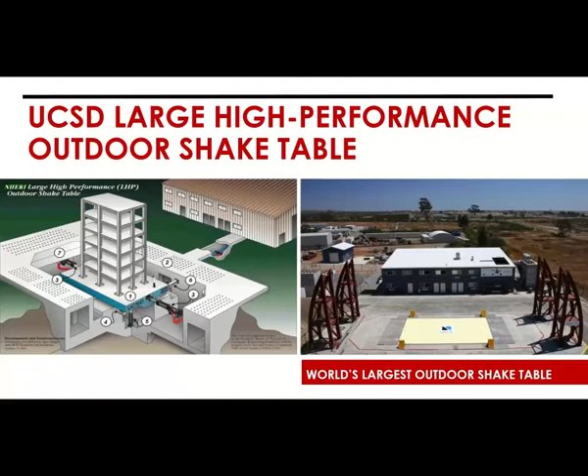This is just a picture of UCSD, University of California San Diego's shake table. It's the largest outdoor shake table in the world, 25 by 40 feet. What's nice about it, since it's outdoors, is you can build as tall as you want and essentially perform real live experiments, testing real earthquakes that can occur. It currently has horizontal actuators, but it's being updated to have vertical actuators as well, so it's actually going to be able to show all the earthquake forces a building goes through, and then test it.

So the overall concept for this study was we wanted to do a 6-story building. Part of the justification for that was wood - there's a lot of wood buildings up to 5 stories, so we felt like going 6 stories was a way to demonstrate what you can do with cold form steel, which is sort of unique. We picked housing as the model for how the building would be designed, representing a multifamily housing building.

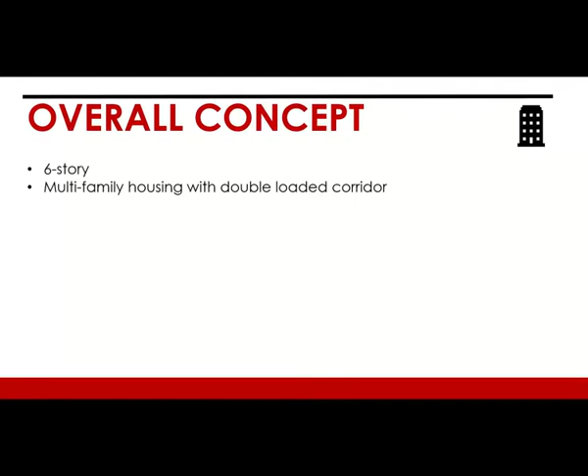The structural components were basically Sureboard shear walls. There were interior corridor shear walls, and some narrow ones on the outside. We put in a little bit of transverse shear walls, not so much because the shake table moves them in that direction, but just in case there's any torsion or anything like that. We used a tension tie rod system, which went down through the whole building. We balloon framed the construction, which is typical for cold form steel, and the sheathing on the floor was actually the Sureboard system.

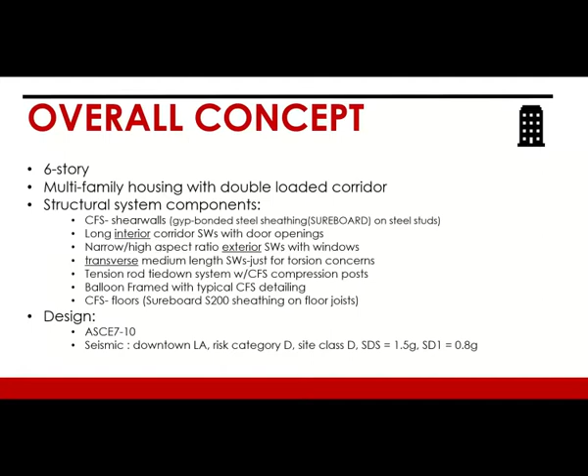And then the design, you've obviously got to pick when you're doing a shake table test, you've got to pick a code that you're going to design it to, which was ASCE 7-10 at that point. And then you got to pick a place. And so obviously you're doing something to test high seismic.

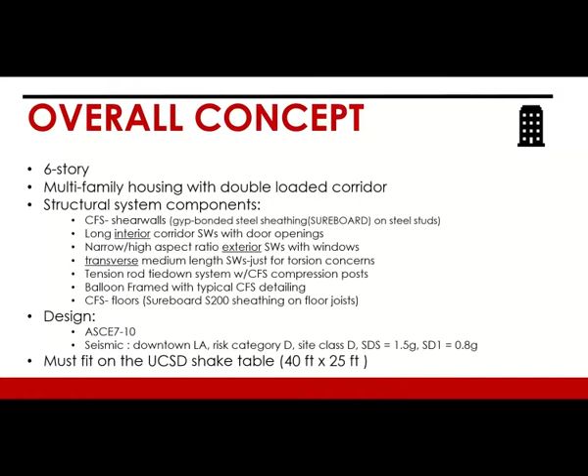So there's no better place than to pick a site in downtown LA. And then the other critical thing is it's got to fit on the shake table, so you can sort of cantilever off of it and do some things to try to get it a little bigger. But we were able to set it up so that it all fit on there. This is actually the footprint of the building. The grid lines you see are where the connectors are on the shake table.

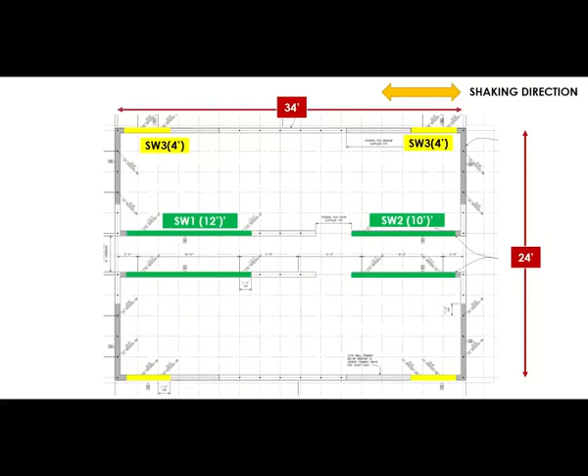And so then we added corridor shear walls, representing a double loaded corridor, so a corridor down the middle. We tried to be representative - architects like windows, a lot of exterior space, balconies and stuff. So generally when engineers design these buildings, we rely mainly on the corridor walls, and in the transverse direction, usually there are party walls that we can rely on. And then this is the party wall stuff we put in that doesn't really get tested, but it's there in case there's some kind of torsion in the building.

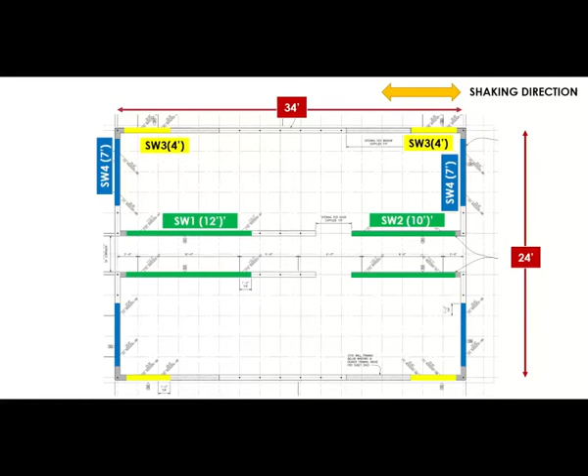And then we actually put a non-load bearing wall down the middle, and this was related to the fire test. In other words, we're going to set fire in a room here, and to create these different areas, we use the party walls or these non-bearing walls to do that.

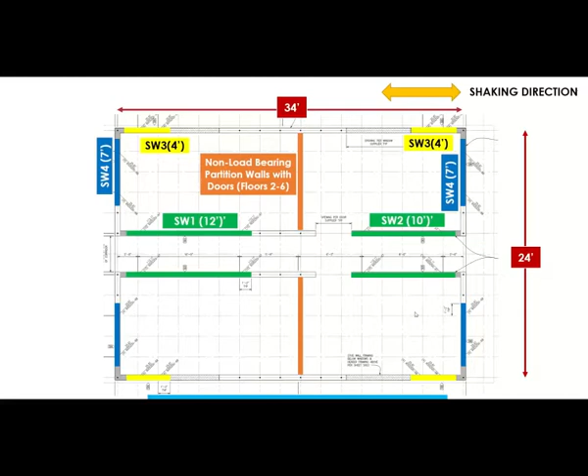One of the things about a building like this and a shake table test is that you really got to have a building that represents the mass a real building is going to have, because the performance is all about how much mass you have in the building. If you build a really light building, it's not going to perform like a real building. Since you can't put gypcrete and all the siding on - that would be expensive - you put these mass plates on that represent all the mass that you can't have.

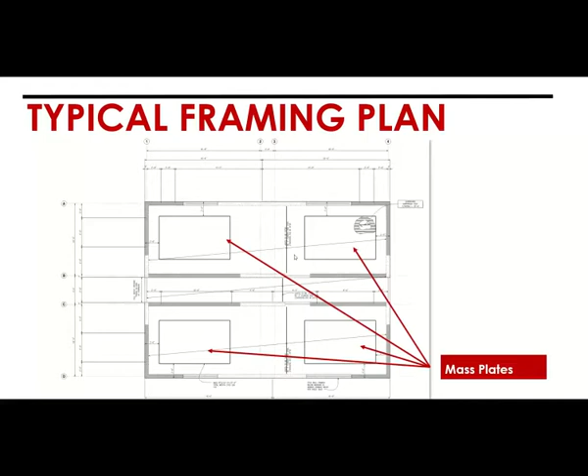And then the other critical aspect of the design is making sure you design the shear walls per code, and you don't over design them, because if you over design them, you end up with an experiment that really doesn't help you. You want it to reflect the engineering that the structural engineer is going to do - the screw spacings and everything else for the shear walls needs to be dialed in pretty well. So essentially you deal with the mass, calculate how much the mass plates are going to be, and use that to back calculate the capacity of the shear walls, trying to get as close as you can to the actual, so the building strength represents what it needs to meet code.

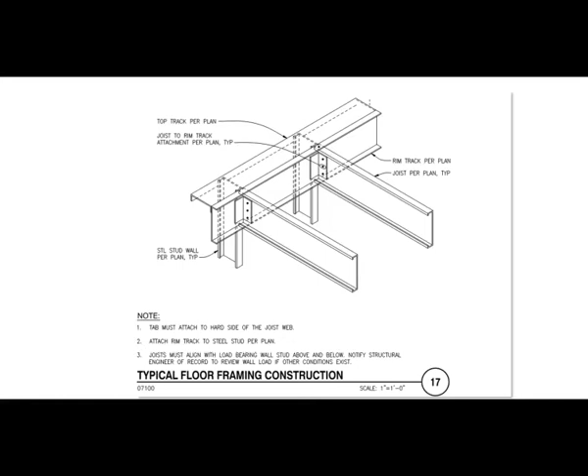We balloon framed. This is just an example of the balloon framing with the track on the side and the studs coming across and connecting to a track. And then this was a typical shear wall elevation, which shows the tie rod going all the way up through, and then there are compression posts on either side.

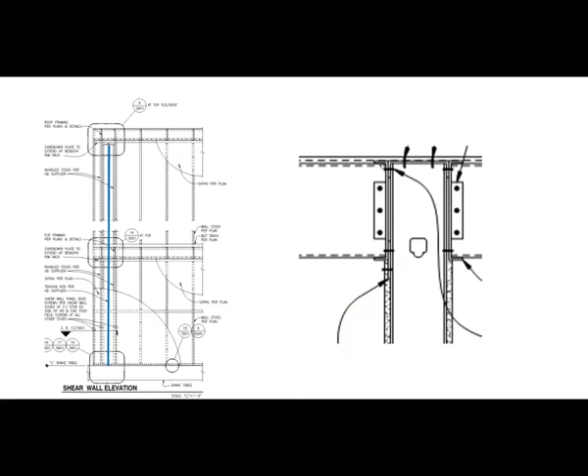And this is pretty standard, particularly in high seismic, to do this kind of a system. The image on the right shows how the shear board comes up, and then the gyp sheathing is taken off, so the shear board can go all the way up and tie into the floor diaphragm.

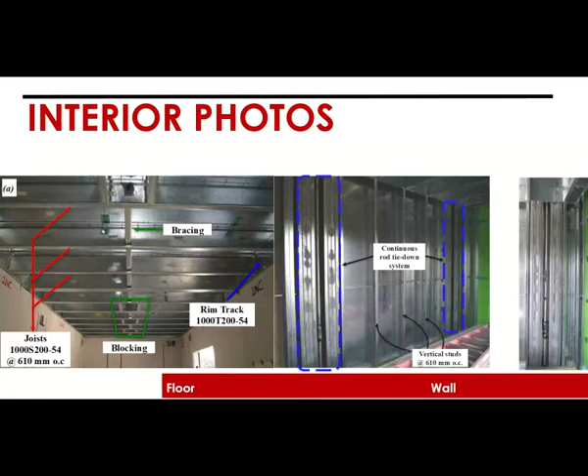And then here's just some pictures of the interior construction, how it was built. Again, you can see the tie rods, the joist, and the studs. This is just to give you a good example of how all that works.

And so now the first video is going to be the actual construction, and you can see how it was built.

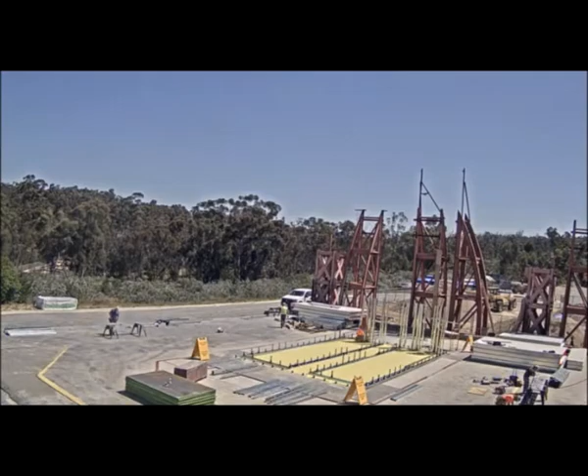The thing that was tricky about it was at the bottom. The first floor really wants to be stick built because we need to have connectors that connect it to the shake table. And so you can tell from the video, particularly as we move along, that this was a pretty long process just to build the first floor.

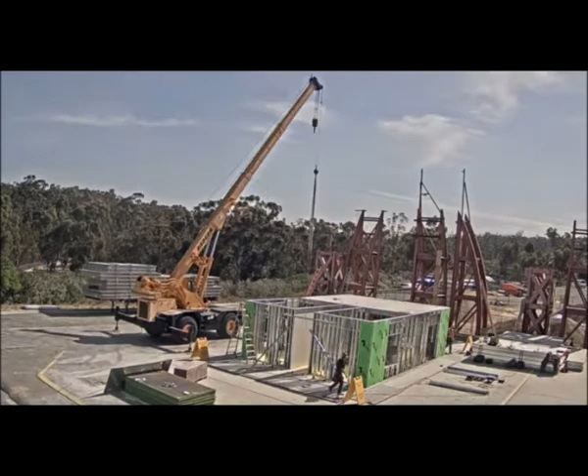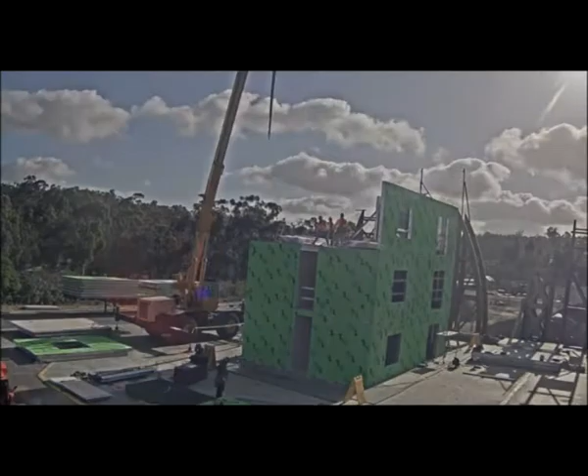You know, because you're basically stick building, which is not the most efficient way to do cold-formed steel. And as we get through the first floor, all of a sudden the panels start coming in, and this goes a lot faster. And then we just keep going up. So we're halfway up the building here at the third floor.

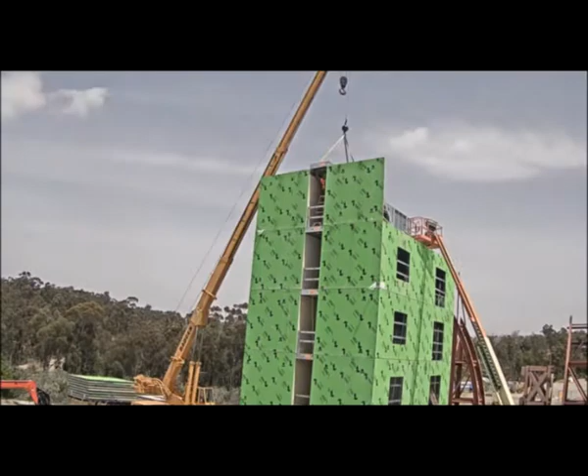So yeah, you can start to see the corridor, the edge of where the corridors are at the middle, and the windows.

So now the issue is about the response of the building. We have to look at the earthquake levels, and there are a number of earthquake levels that we deal with. We're going to be subjected to a lot of earthquakes: some 25% design level earthquakes, just to get a feel for how the building is performing in the periods. Then we'll increase up to 50% of design level, which would represent a small earthquake, then 100% of design level, and all the way up to what we call an MCE earthquake level, which is 150% of a design level event.

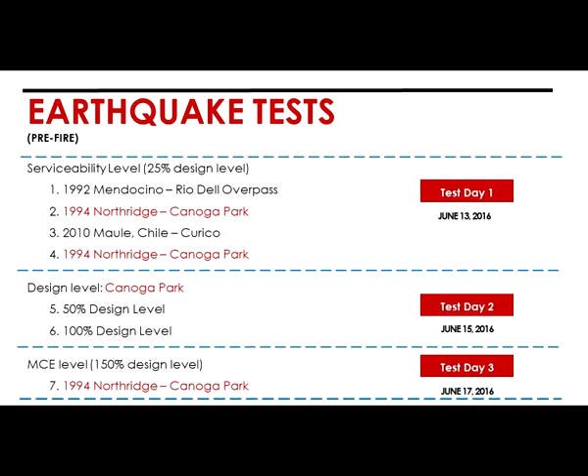What's important to understand is that the design level earthquake is really two-thirds of an MCE, and we would expect the performance to be at a life safety performance level, with moderate loosening of connections and yielding of materials based on the design level earthquake event.

But the building is also meant to be, when you design it for the two-thirds MCE, anticipating that it's going to meet collapse prevention for the really big earthquakes, the MCE.

For Los Angeles, the MCE would be somewhere around a 7.2 Richter magnitude earthquake. For that, we'd expect to see a lot more damage - sheathing sheared off, members yielded, and significant damage to the building. But if it doesn't collapse, then people should not be killed by it, and so it's actually meeting what we engineers would like to see.

Immediate occupancy is also something that is looked at, but for this building, obviously it's a housing building, so we aren't really looking at immediate occupancy.

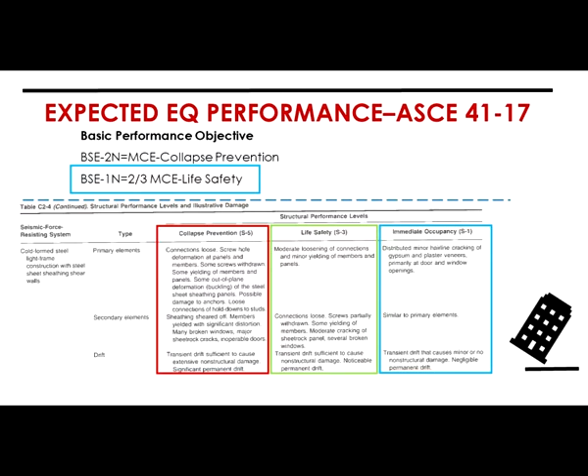So this is sort of my expectation. I wouldn't expect to see damage to diaphragms because they're short spans, and the transverse walls aren't going to really see any motion, so there shouldn't be damage there. I wouldn't expect damage to the tie-down system because that's designed for some pretty large forces, and no damage to compression posts because they're also designed for major forces. I'd expect some limited damage to the short shear walls, but the diaphragm is pretty stiff, so the corridor walls are really where we'd expect to see some cracking of the gypsum board and shear board, and cracking of some non-structural walls around there.

We'd expect to see some pretty good transient story drifts, which is really how much drifting in the building happens during the earthquake, and then some residual drifts as well.

We'd expect to see sort of more damage than you might with a normal building, just because we're subjecting it to multiple earthquakes - it's going to be really raked over the coals. The foundation is also very rigid because we're locked onto the table. In the real world, foundations will rock, and that will actually help limit the damage a little bit in these buildings.

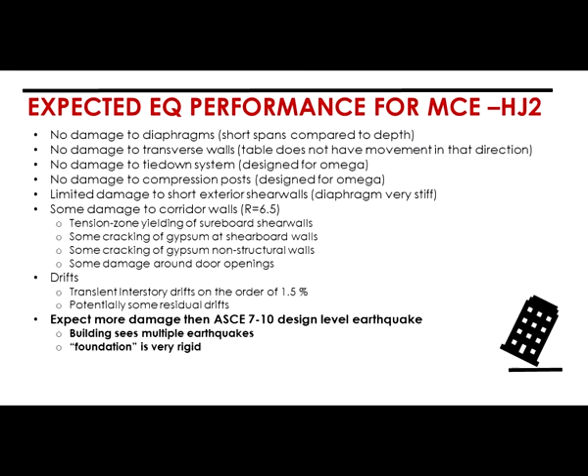So we're going to jump - we actually subjected it to some lower level earthquakes, but we're going to go ahead and jump to the MCE. This is the big earthquake, and this is obviously before the fire - there hasn't been any fire testing on this. It's just been subjected to about 5 or 6 other earthquakes that are lower, and now this is when we get to the bigger one.

Oh, oh man, that's cool. Wow.

All right Steve, yeah. So this is just to show you some examples of the damage for the lower level earthquakes that we saw. This is 25% and 50% earthquakes, and you can see there's minor cracking of the sheetrock, but not significant damage, and you wouldn't really expect to see significant damage for these lower level events.

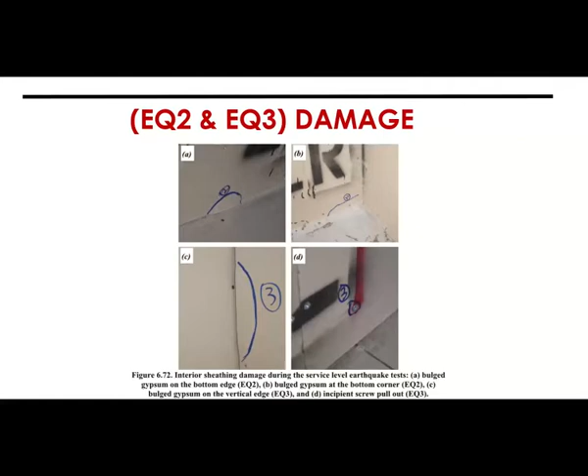This is EQ6, the design level earthquake, and so there is a lot more cracking. This is where the shear wall was banging into a non-shear wall element. That was part of the function of the panelized aspect of the construction.

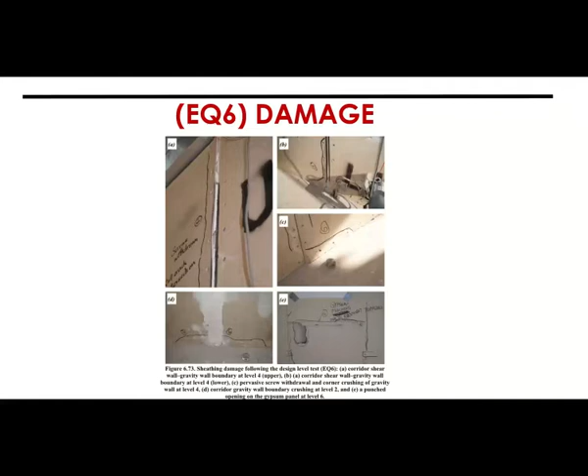Again, doorways, you can start to see doorways having distortions, and so in an earthquake the doors can jam closed, which is not a very good thing to happen. And again, this is the shear wall banging into a non-structural wall.

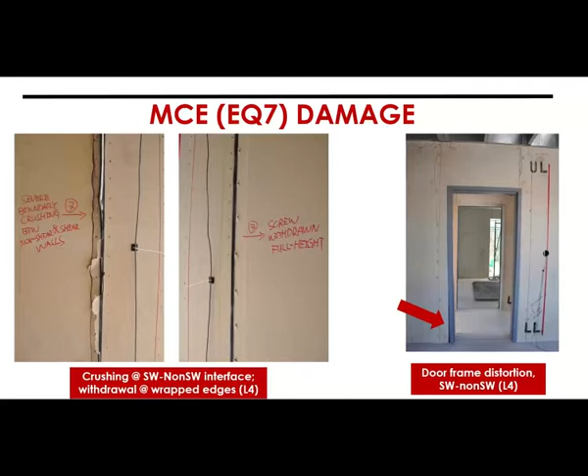You can see for the big earthquake, we started getting some buckling of the track. This is where the shear board chip was taken off the shear board to connect it into the diaphragm, and so that's started to buckle as well.

And then the corners of the shear walls are starting to buckle a little bit here. Again, no real damage to the tie rods or the compression posts. They're all in very good shape.

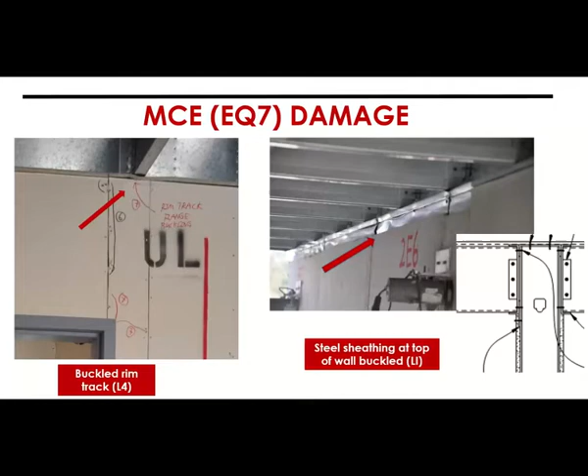Okay, so summary. For the service level earthquakes, which is really the small ones, there's minimal damage. Everything was pretty much elastic in the period. The period's still actually pretty stiff for this building.

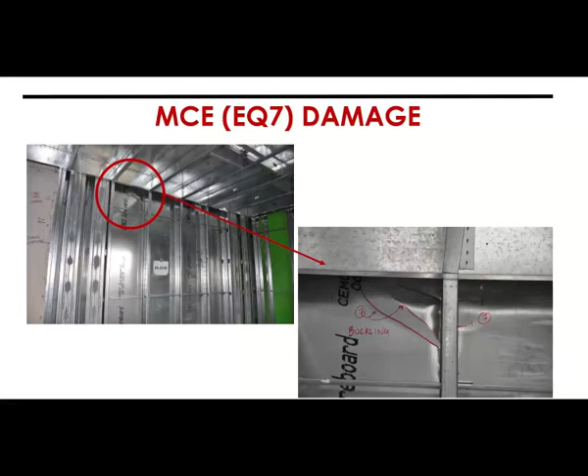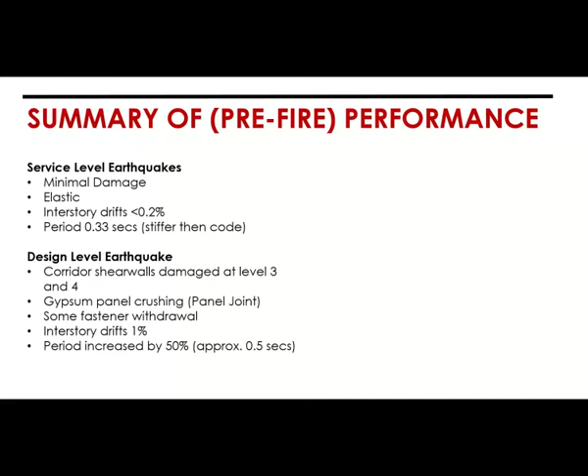Design level earthquake, corridor walls are damaged at level 3 and 4. Started to get some gypsum panel crushing, some fastener withdrawal, and a story drift of 1%. Period increased by 50%, up to 0.5 seconds. Then this is the MCE, and we had steel sheathing buckling near attachment points and corridor walls, and a story drift of 1.5%.

But the interesting thing was it was all repairable damage, which is not necessarily what you would expect for a building that was only going to meet collapse prevention. You would expect more damage than that, and potentially non-repairable damage as a result.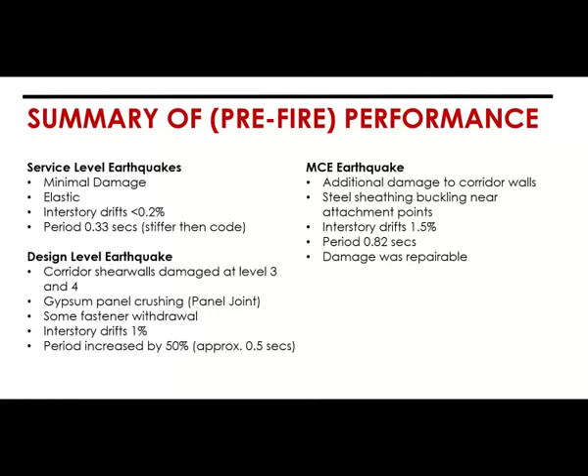So then after doing that, we did the fire test, and the fire test was pretty extensive too. You can see this was sort of the criteria - they picked the floors where we saw the most drift and likely the most comprehensive damage from this earthquake. And then we did fires in a number of places, and the fires actually got pretty intense because there was a lot of openings, no windows and stuff, so it was almost like a chimney effect.

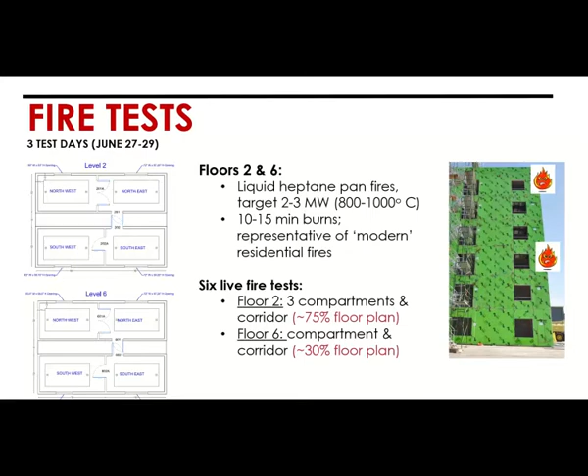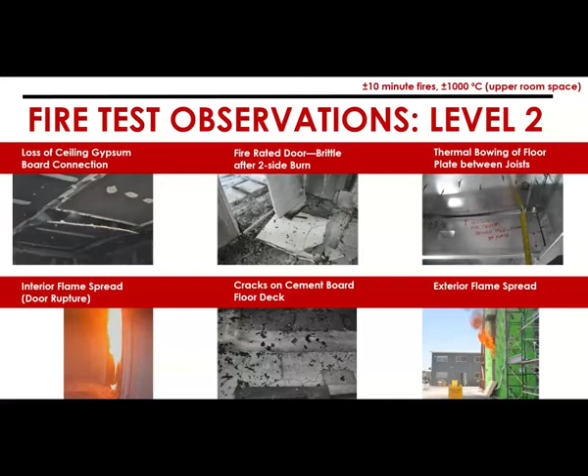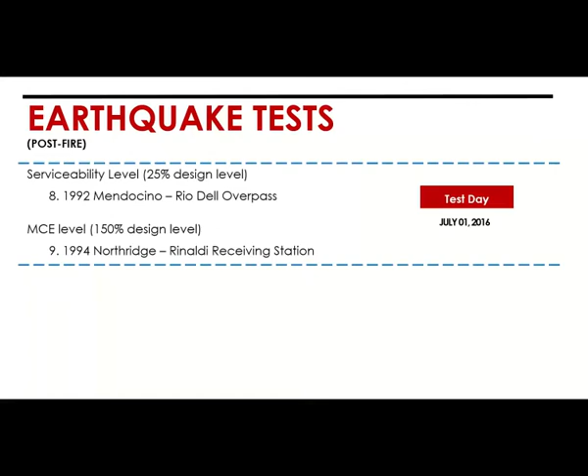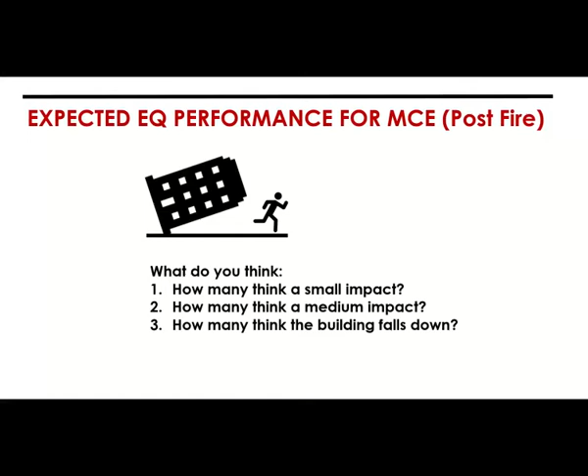So now I'm going to show you a couple more videos. The first video is a view of what's going on inside the building, and then afterwards we'll do a perspective from the outside.

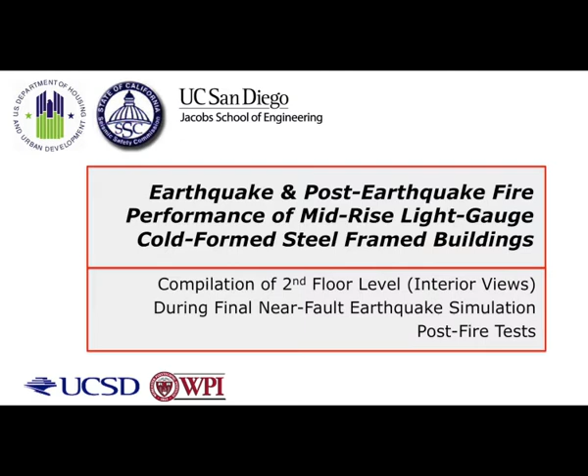This is actually Sarah Hutchison's daughter - Tara Hutchison's daughter - playing the piano in the background on these.

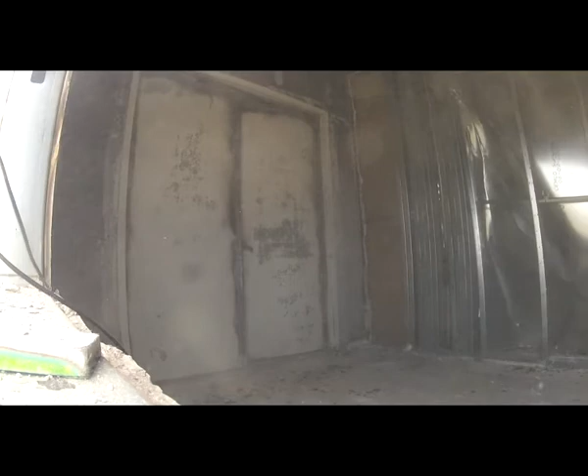So these are just looking at it from different rooms. You can see that it'd be pretty scary to be inside the building.

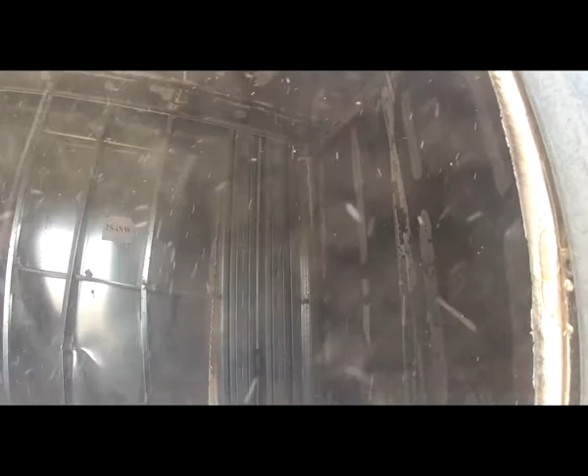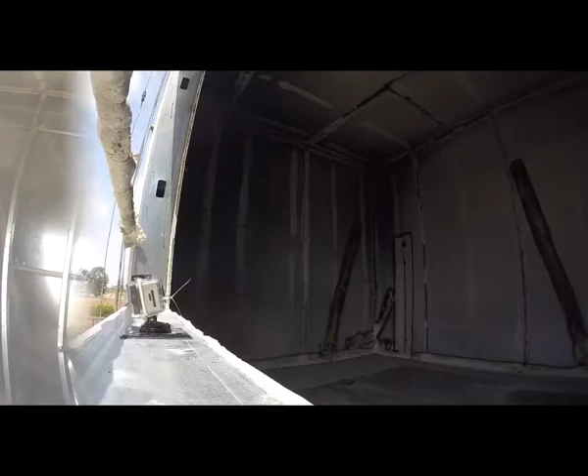You can hear the horn. They always play the horn before they run the earthquake, just to let everybody know that it's starting, the shake table's starting to operate.

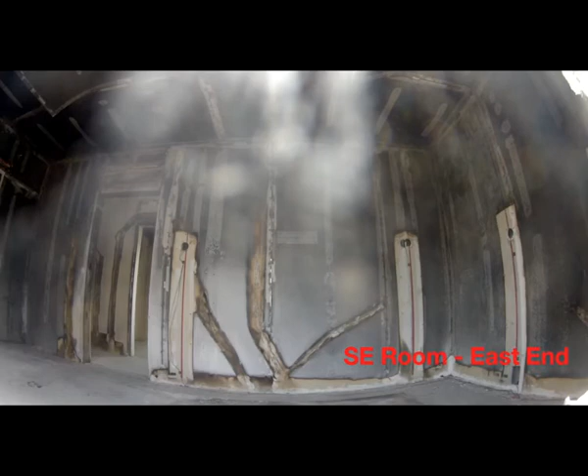So a lot of cameras in this building.

So with that video, you can see basically that the whole second floor story hinged. Essentially, the only thing that kept the building realistically from falling down is the tie rods that were still intact and were able to hold it up.

You can see the damage inside was pretty significant in terms of total failure of the shear walls. Essentially, they've totally disconnected. The tie rods are still intact, and the compression posts are still doing very well, and that's really what allowed the building to keep from falling over. Otherwise, it would have fallen down.

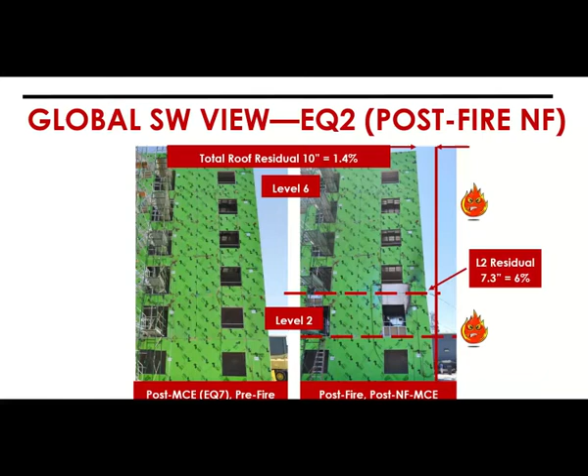You can see there was drift at that level of 7.3 inches, and the top of the building was at 10 inches. So 6% is a pretty large amount of drift in a building. It was a good lesson to learn about tie rods and how well they're able to perform and provide support for buildings.

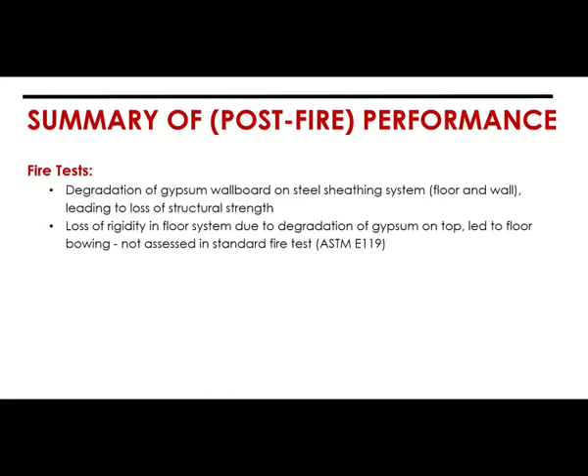So the fire test showed the degradation of the gyp wallboard on the steel sheathing, and that really led to the loss of structural strength. The shear board sheathing really needs the gyp to stay intact for it to perform at the level that we want.

Loss of rigidity in the floor system due to the degradation of gypsum on top led to the floor bowing, so we also had some floor bowing. And then the earthquake aftershocks significantly attenuated the demands on the building.

The only thing I would point out from the experiment is that the fire, if you think about it, there's a lot of fire in the building. So this really would be more representative of a building where there had been a major fire - in other words, it burned a big portion of the building. If it was in one room, then the other areas of the building would be relatively intact and able to perform well during an earthquake.

But this, because we're doing this as a shake table test and we can only do a small footprint of building, and then we do the fires, that can have a big impact on the overall building and not just a portion of the building.

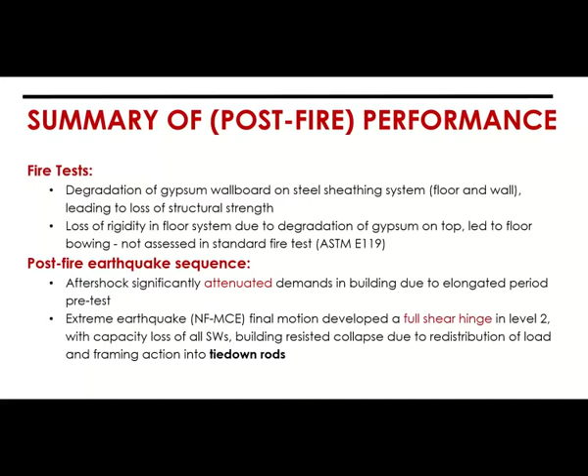So again, we had full shear hinging on level 2, but the tension tie rods held things together. So, overall findings.

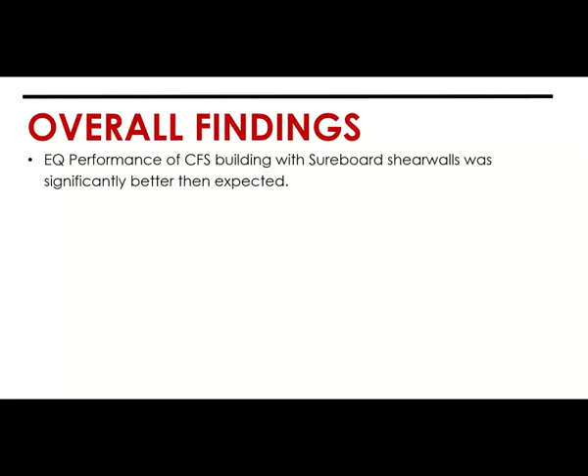The earthquake performance of the CFS building with the Sureboard shearwalls was actually significantly better than expected, for the pre-fire performance. The damage was pretty minimal even for the really big earthquake. I feel we were performing a lot better than a collapse prevention only building would be considered.

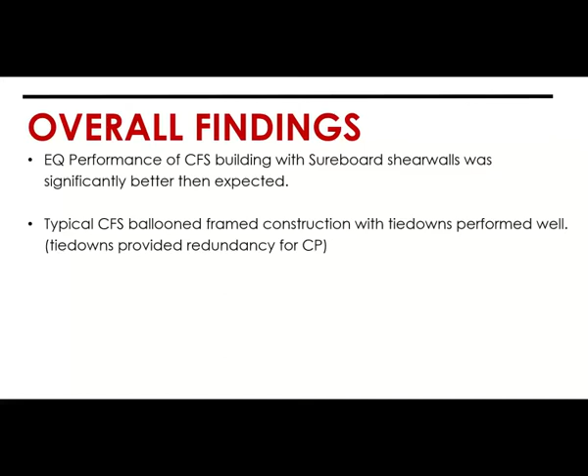Overall, the balloon frame construction and the tie downs performed well, and they seem to be proven to be a good building system for cold formed steel buildings.

And then the other finding, obviously, is that fire in a building like this could represent a significant hazard. So from aftershocks, since the damage - if it's in a fire, you're likely to have damage in an area of the floor, and that can create a soft story and create shear hinging.

But the only issue I would also add is that technically the building didn't fall down. So in that sense, that's a very positive thing for a building to go through that kind of fire and that kind of damage and not fall down, even if it stays up through a secondary element.

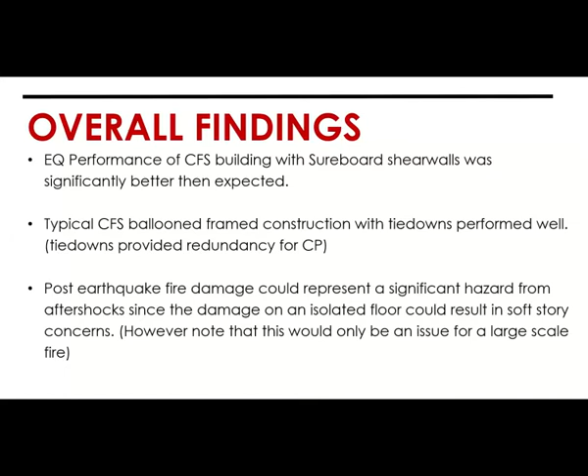Okay, that's my presentation. I'll be happy to answer any questions that people may have now.

If you've - okay, thank you, Harry. Despite some technical issues there, I think we survived. We survived that one. But again, we did get some good questions here. I think I'll take a couple here.

The first is relative to the seismic loads that were imposed on the building - what would be an equivalent on the Richter scale? Well, on the Richter scale, the MCE earthquake - the Richter will vary depending on the area of the country you're in. In downtown LA, the MCE is generally like a 7.2 or even a 7.25. So that would have been the MCE, which was the big earthquake that you were seeing.

Okay, very good. Next question is, what kind of result would you anticipate from these tests if the building was fully loaded with furniture, refrigerators, people, etc.?

Generally in an earthquake, it's the mass tied into the building that you can get shaken around. We actually did have some of that. There were stoves and water heaters, and we were testing the strapping for those things. This was somewhat sponsored by the insurance companies, who paid for some of that. There was a case where the water heater actually broke loose in the earthquake and leaked water over the building. But I wouldn't expect a significant increase in structural damage, although interior stuff could get banged up from furniture and things loaded in the building.

We have another team member who was involved in the wall fabrication and panelization of the system, Diego Rivera - I'll introduce Diego quickly with the SWS Panel. Diego, do you want to take that question? Thank you for the introduction. I did hear everything - great job, Harry.

That's a great question. I think having the ability to have a compression table, which is what we do in the shop, lets you cover that gap - you can see that screw on the left in the picture - and not create anything more than what the radius of curvature of the track would allow for that stud to be fully seated in the stud connection. It eliminates any of those shear questions we're asking. So stick framing, when you go to the high gauges we were using, it's really hard to get a 16 gauge stud embedded into a 14 gauge track or vice versa. You really have to understand the radius of curvature - compression tables and panelization are the right techniques for that.

One thing I would say is that in this building, where that becomes a bigger issue is obviously gravity loads. If you start to load a building up and they start to seat themselves, that can create issues. In this building we really didn't have the full load—the spans were pretty small because of the footprint, and we weren't putting all the load on the building. So I'm not sure that would have impacted the testing all that much.